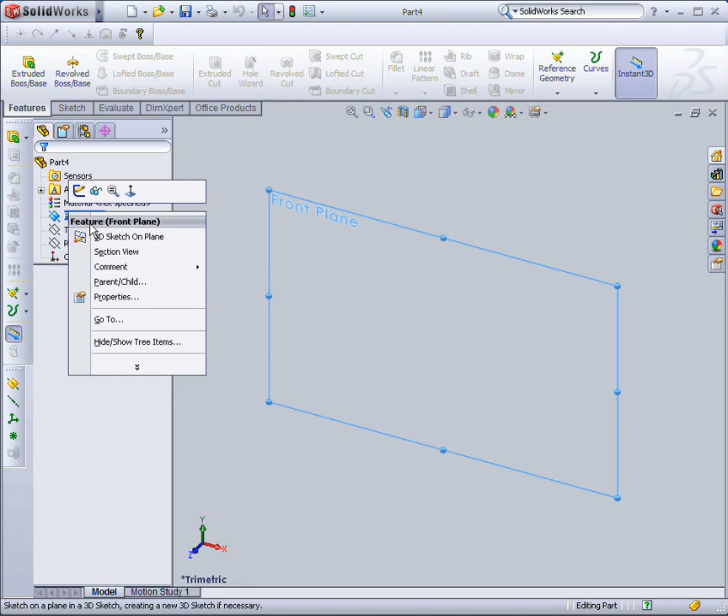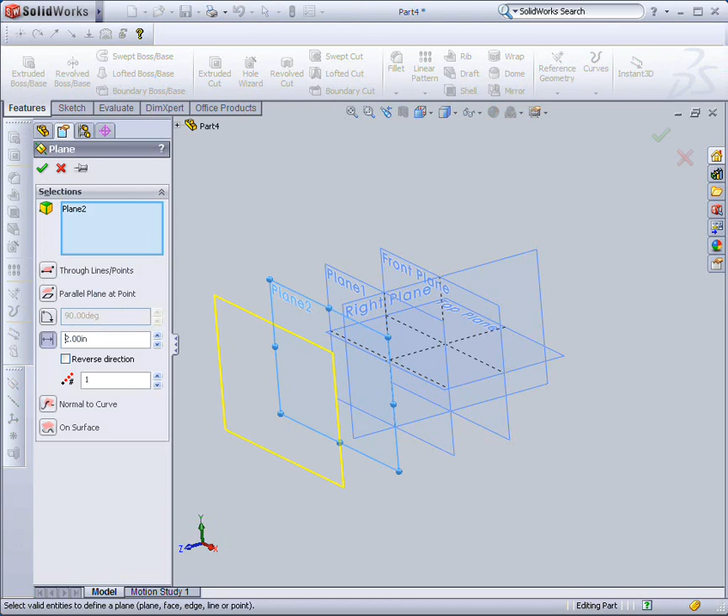Then we're going to copy some planes. Hit the Control key, and drag this plane over here. That'll go over 2 inches, so enter 2 and check OK. Hit the Control key again, drag out the next plane 2 inches, and hit OK. We'll repeat that again and drag the next plane out 2 inches. Now you should have 4 different planes.

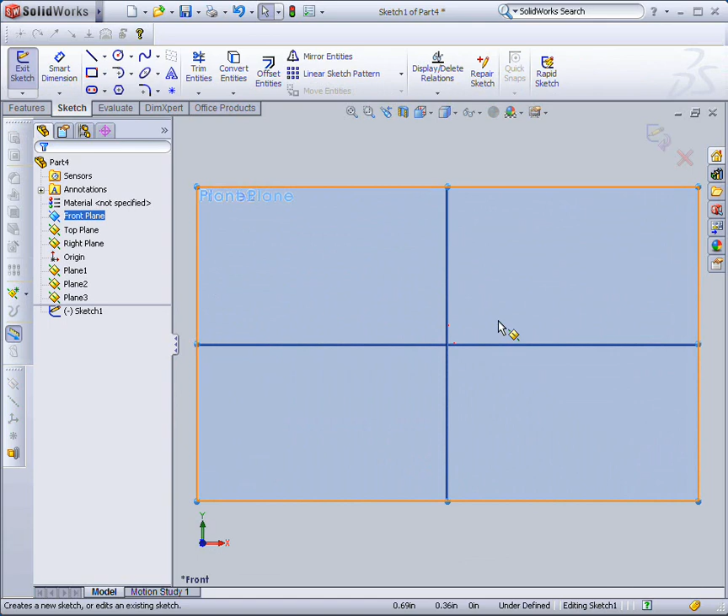We're going to use these planes to define a loft feature that will create our fuselage. So I'm going to go back and select the front plane, and open a sketch on the front plane. We'll start out by sketching the left side of the fuselage.

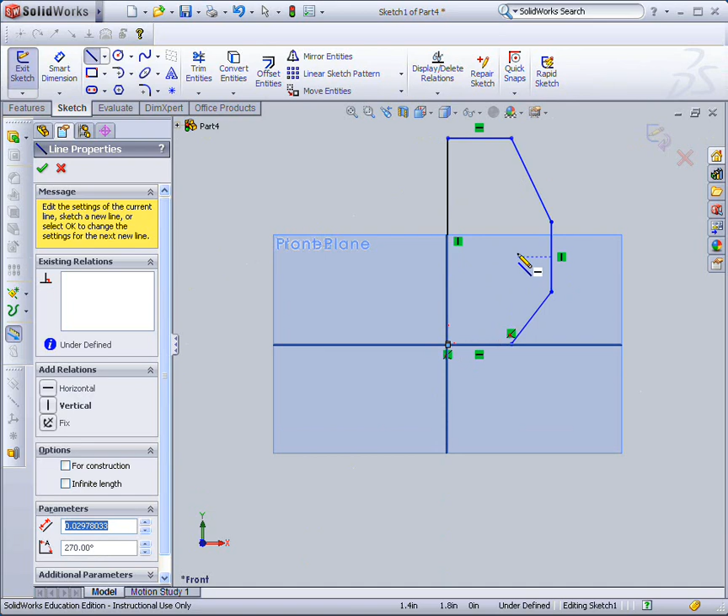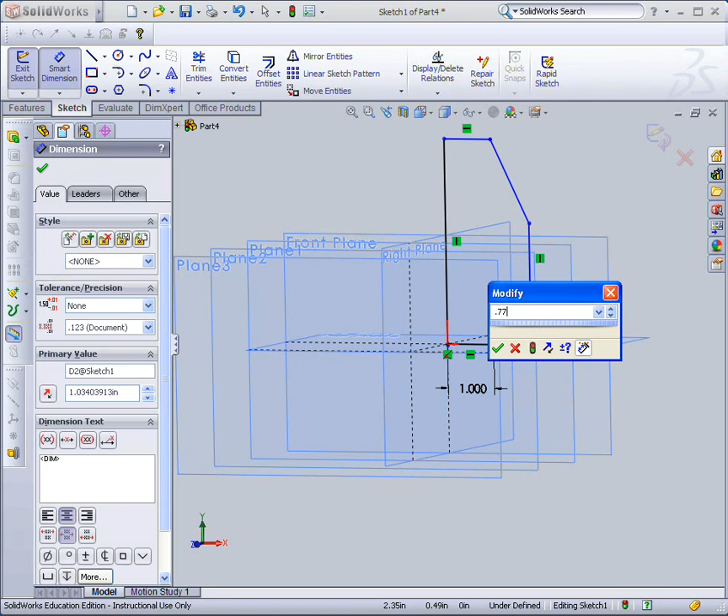So we put those sketch dimensions in, and then dimension the following edges. This one's 1. This is 7, 7, 0. This is 2. This from here to here is also 1. And the whole thing is 4 inches high.

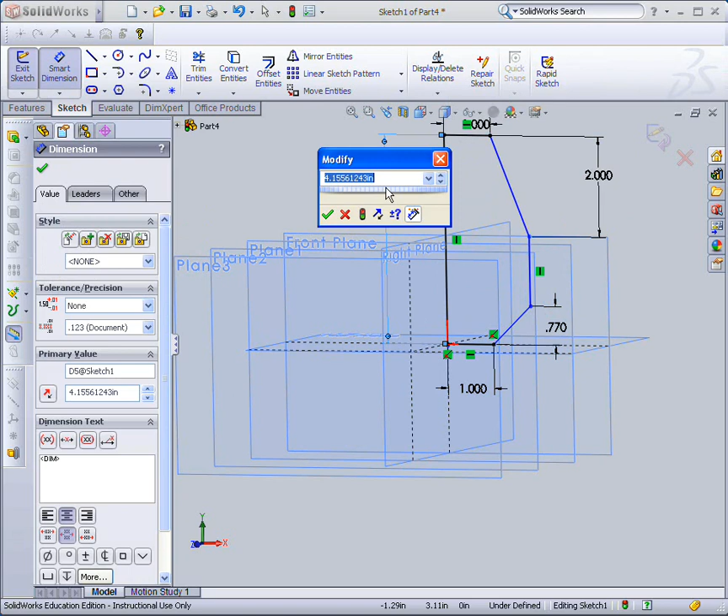And I need a width yet to define that portion. It is 2 inches out from the center. So that's our first sketch. And this dimension's wrong, I missed that one. That is actually 1, not 0.770.

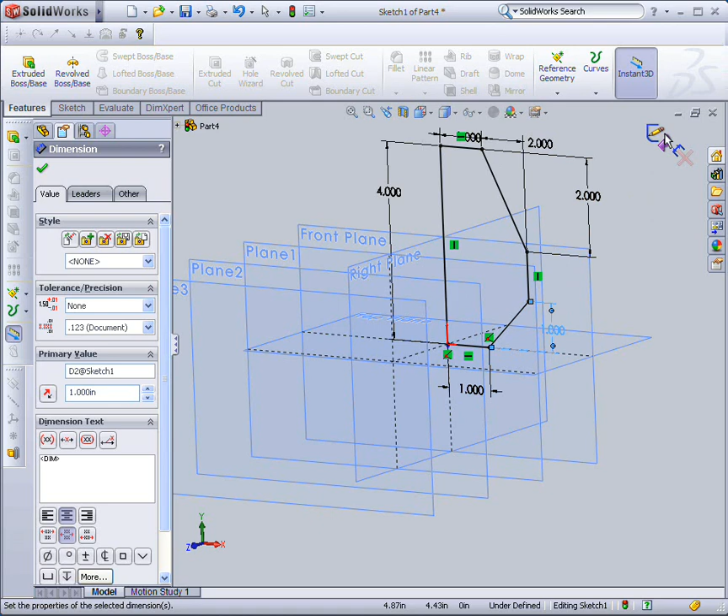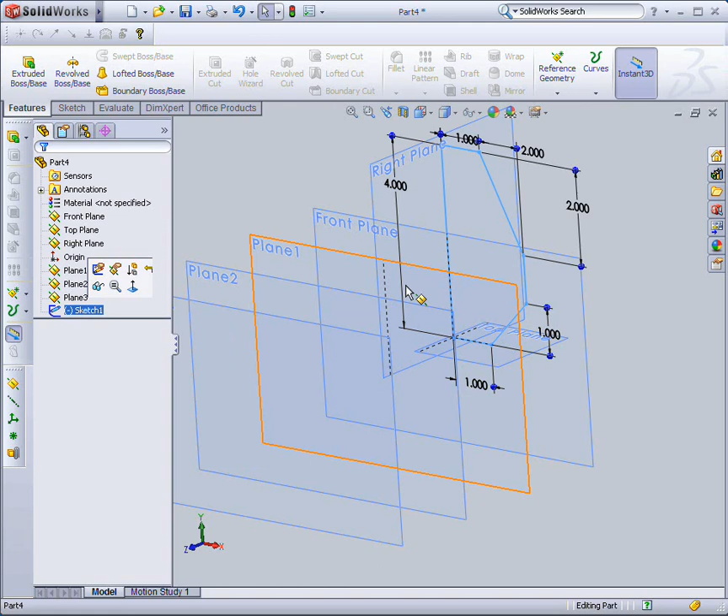So exit our sketch again, and there we have the first sketch for our loft. Now we're going to go over here, select the sketch, turn it blue. We're going to hit Control C, then go on to plane 1 and hit Control V. We've just copied and pasted our sketch.

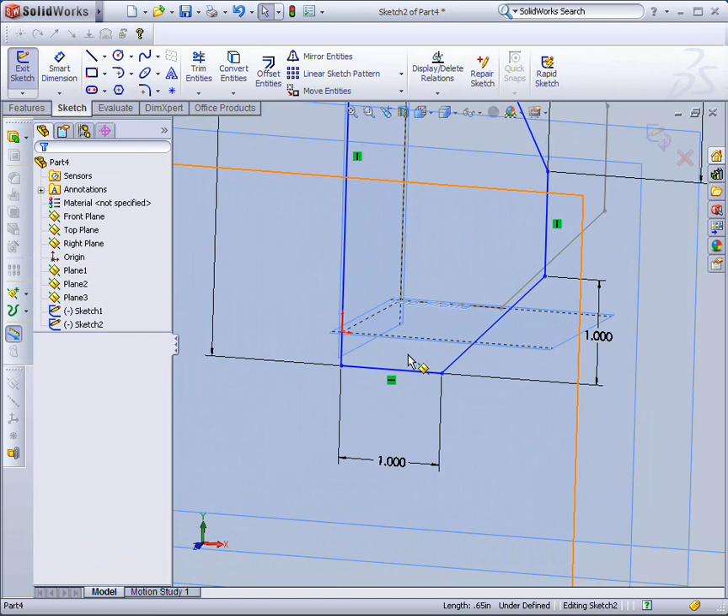Now some of our dimensions are going to change. So we'll right click on that, go to Edit Sketch. You can see everything's blue right now. So we're going to drag some of these around. Ooh, that's interesting, put that extra line in there. So this one we're going to select there, make those collinear, and then we'll do the same with this line here. And if you notice, our whole sketch is constrained now.

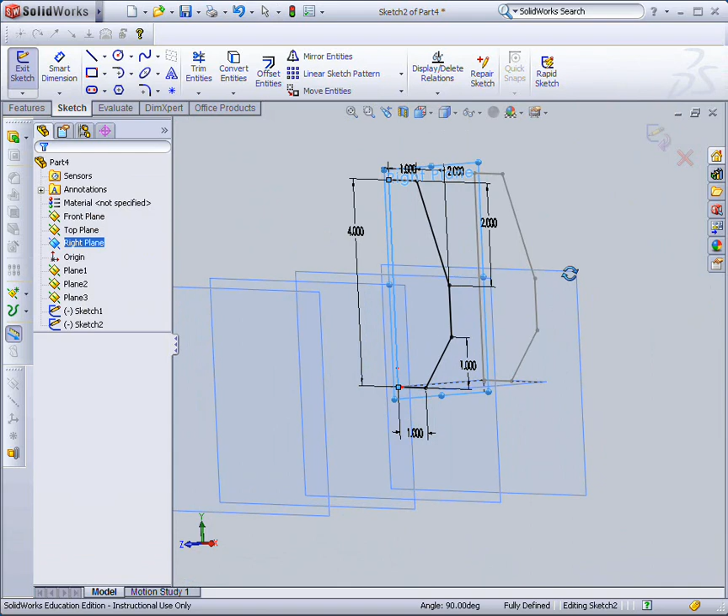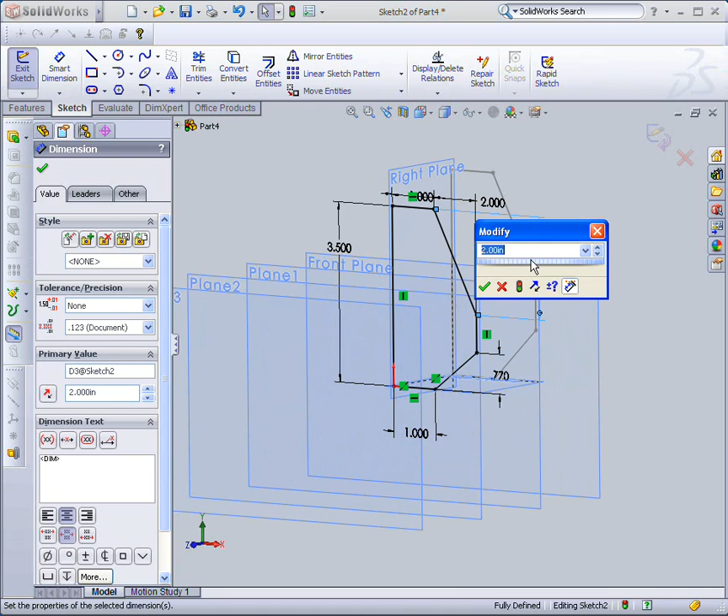However, we have some slightly different dimensions. So instead of 4, we want to make this 3.5. Instead of 1, this is going to be 0.770. And we're changing this to 2.5. Oops, no, that can remain 2. And we're done for that sketch, so we can exit out of that sketch.

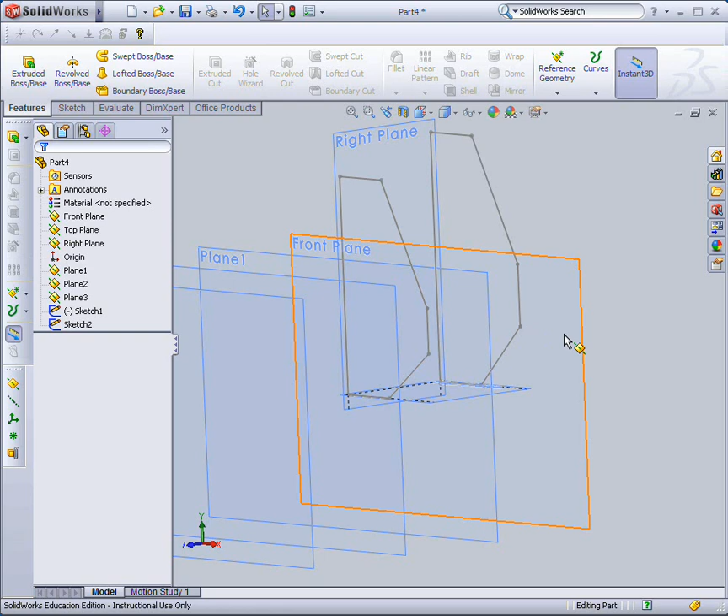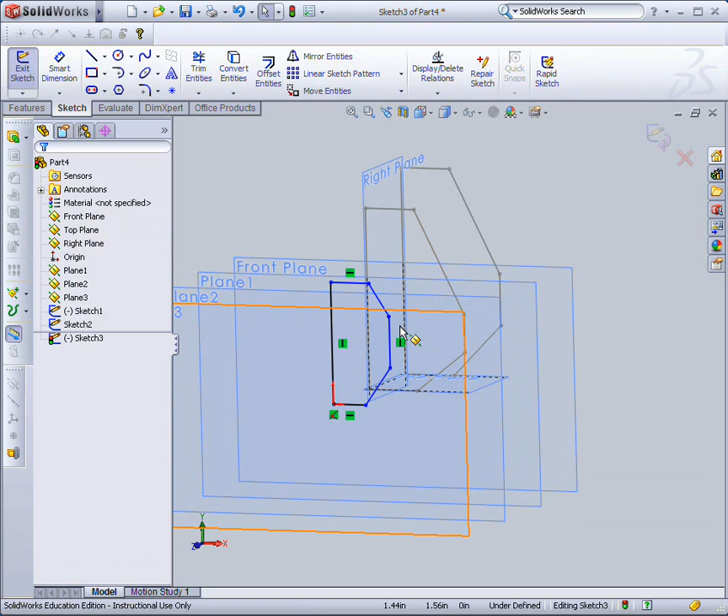The next one we're going to do, we're going to open a sketch on plane 2. Instead of copying it this time, I'm just going to draw a new one. So this one, I'll start down here at the origin, go across, up, this way, back, to there, and then down. Again, we could copy it and modify the dimensions, but I want to show you each way to do it.

So this one's 0.75. This is 2.5. This should now be 1. This from up here should be 2.5. And this will be 0.770.

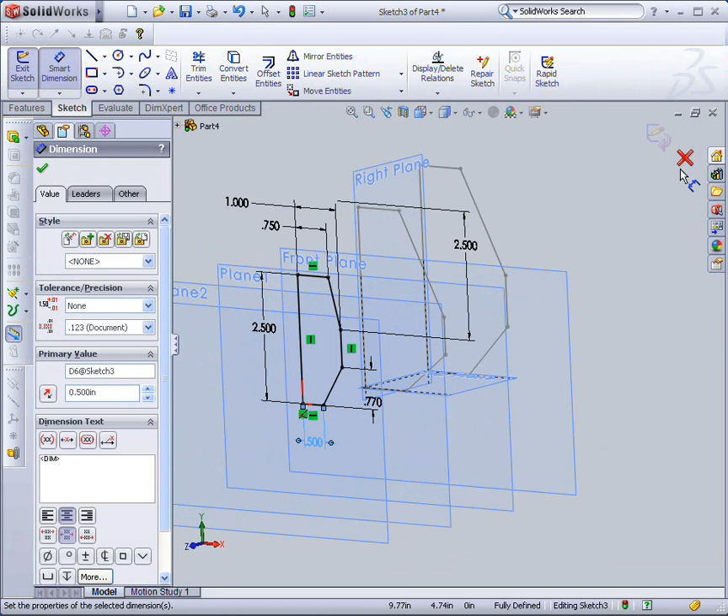Oh, and we're missing one dimension yet. This bottom one is also now 0.5. So that one's fully defined. Exit out of that sketch. Open up a sketch on plane 3. So notice every time I've been doing this today, I'm using the right click to get to the sketch command.

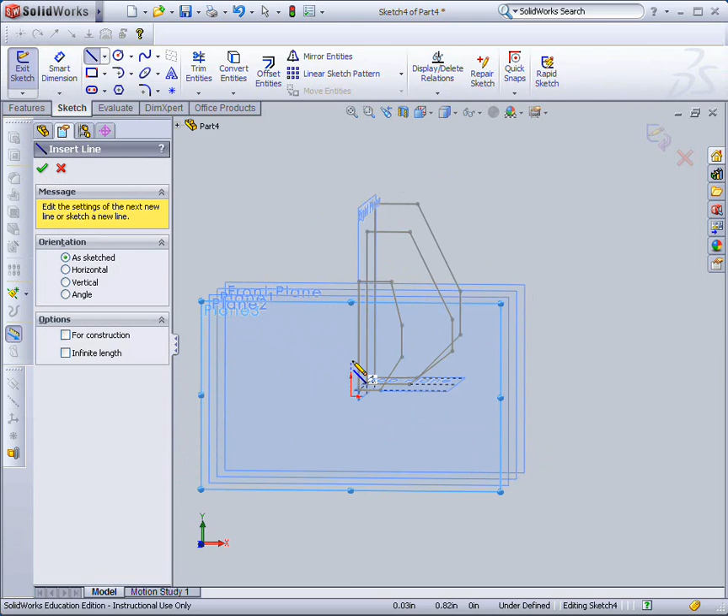In here, we're going to sketch it again. So go across, up, and we've got our last section of the fuselage.

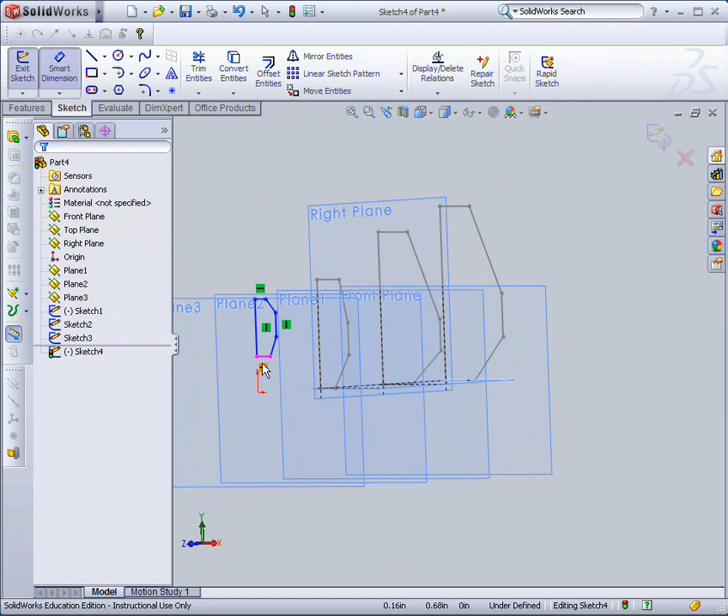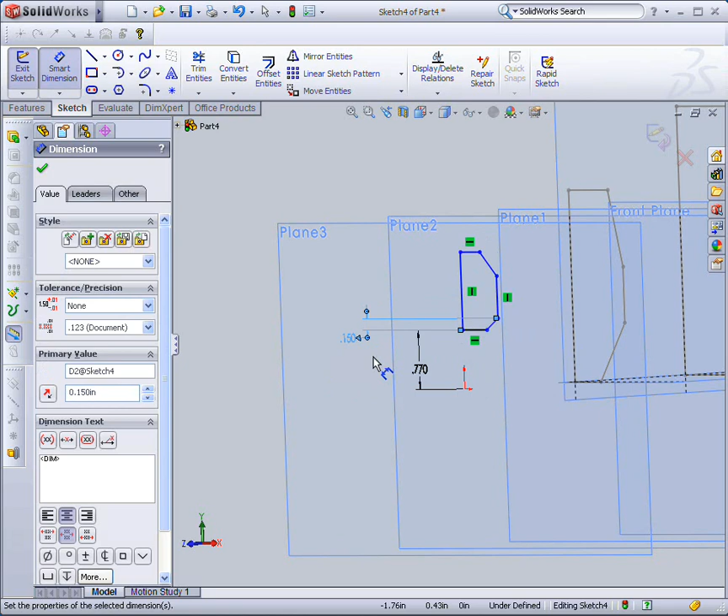This one, when we switch over to dimension, the bottom edge is now 0.770 up. Then from there to here, much smaller, that's 0.15. This whole sketch is still 0.5 wide, and from the top to here is 0.25. Our overall height, which would be from here down to the bottom, will be 1.5.

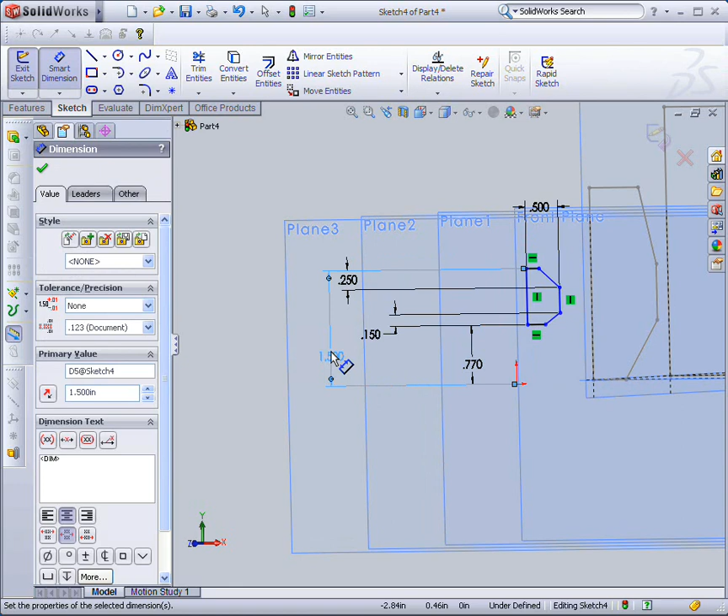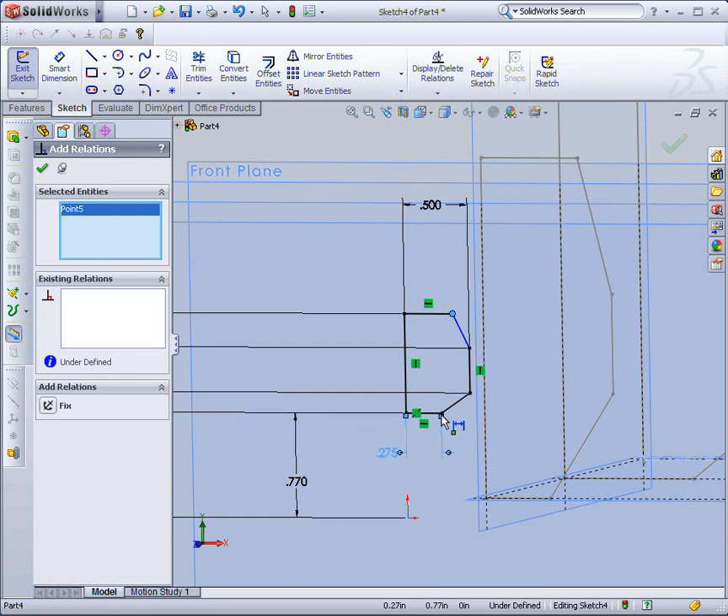And the last thing we have to do is, I could do it two ways. I could pick one of these vertical edges, or I could pick the right plane. We're going to add a relation between the right plane, this vertical line, and make that collinear. And, aha, forgot these dimensions. This is 0.275. And those edges, or endpoints, are vertical. Okay, so now we've got this.

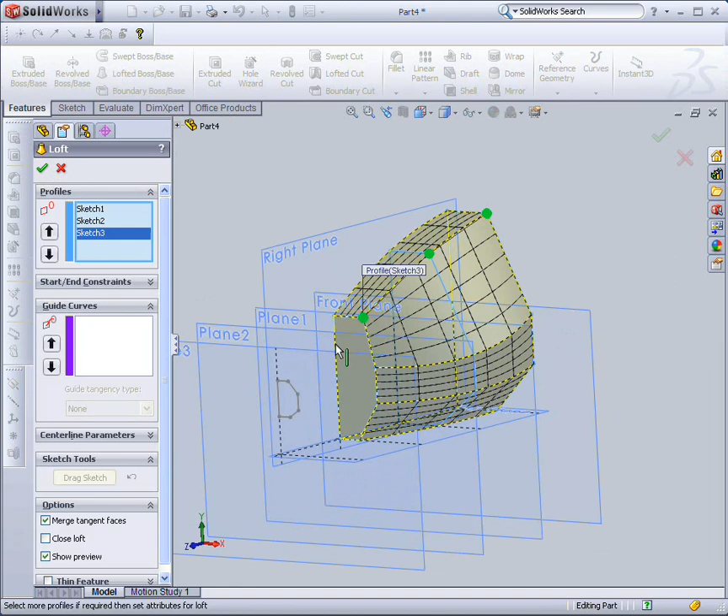Now we're going to go up and select lofted boss base. I want you to click on each of these vertices, and we'll create the outer shell of our fuselage. Once you have that created...

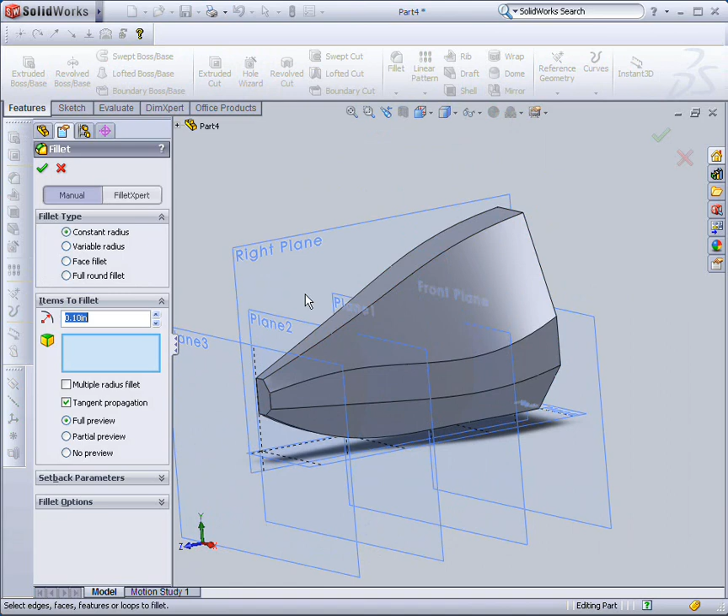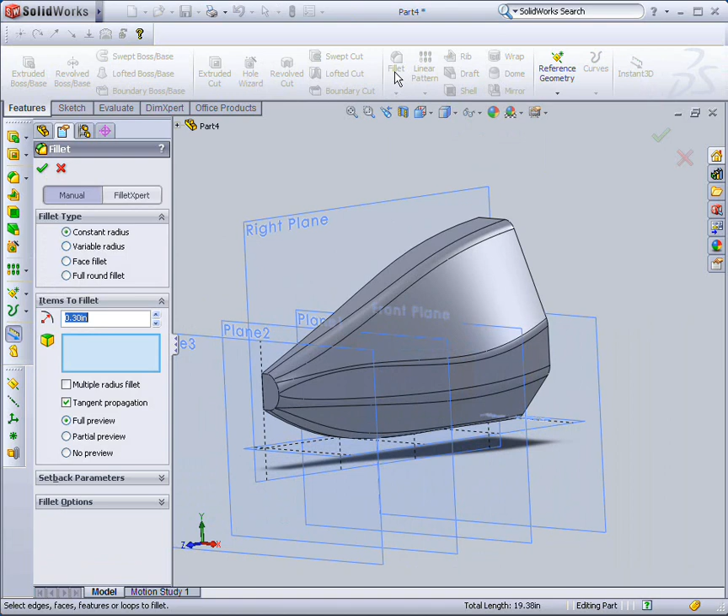Then I want you to apply some fillets. Go up here to the fillet tool, grab this edge, that edge, that edge, and the bottom edge. We're going to move those up to 0.3. Select OK. And then we're going to add a second fillet up here on the nose. Select one of the edges. Tangent propagation should be selected. Check OK.

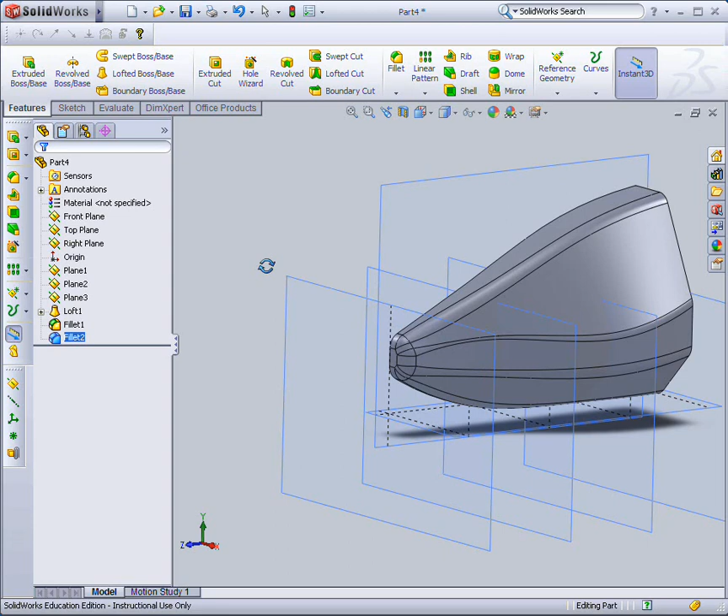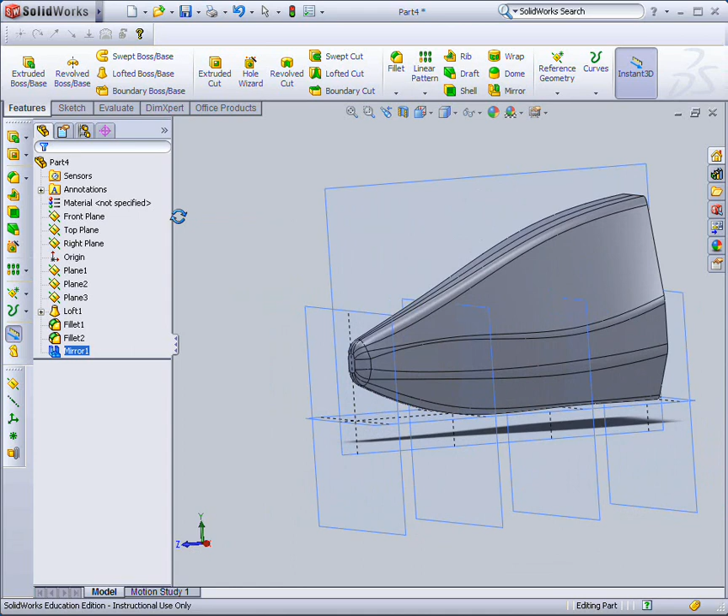And now you've got the start of half of the helicopter fuselage. Up under linear pattern, we're going to select mirror and select the right plane. We want to delete, we don't want to mirror features with this, we're going to mirror bodies. So we're going to select the whole body, check OK, and fuselage is starting to take form.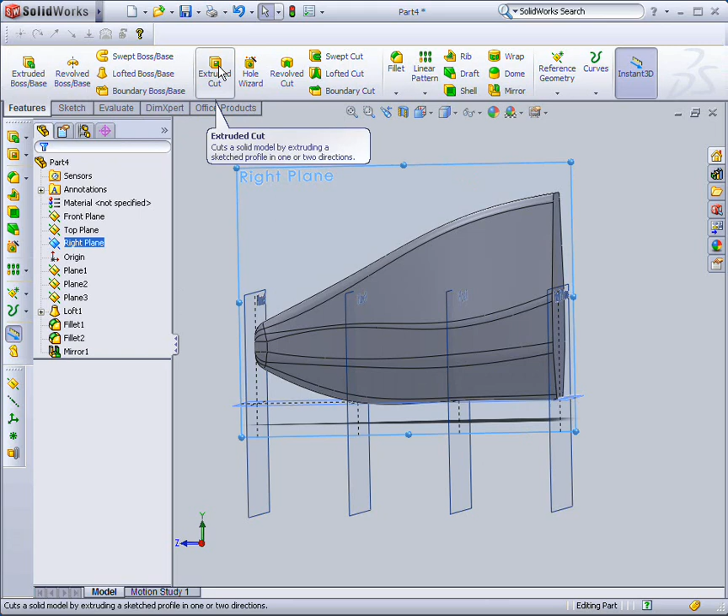The next thing we're going to do is cut away the back portion of the motor area. So I'm going to select the right plane, go up to extruded cut, and draw in a triangle.

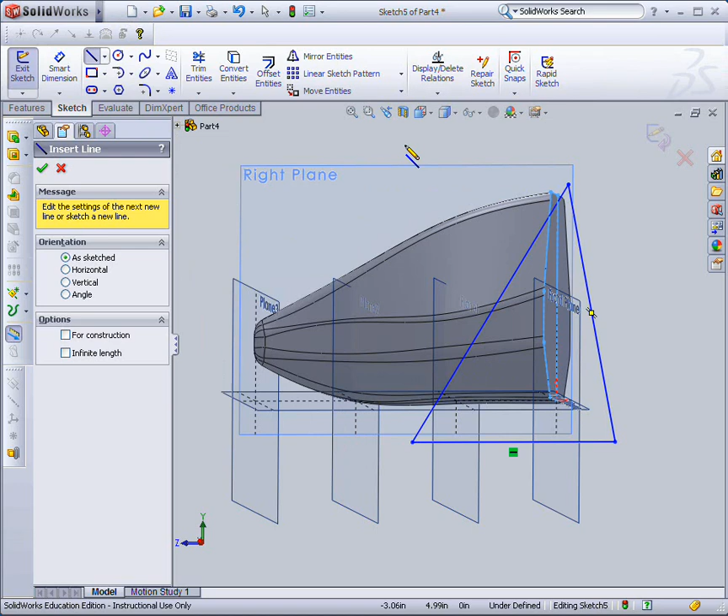So I have that triangle in place, and I'm going to go up here in my part tree, and select these sketches. I'm going to turn that back sketch on. And what that's going to let me do is make these ends coincident. So I'm going to drag this one over, pick that point, drag this one up, get the origin, and look, I didn't have to go add my relations. And then the last thing I'm going to do is dimension this line. That should be 2.

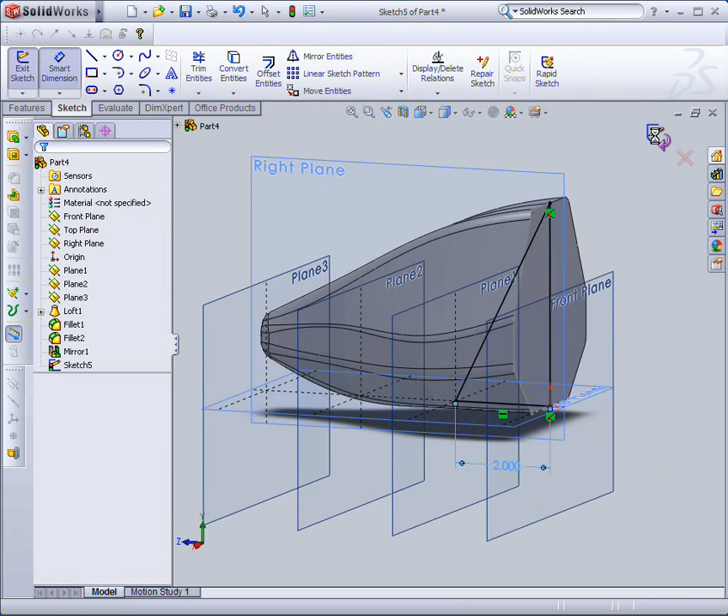And check OK. And since I clicked extruded cut first, it opens up the extruded cut. And then I'm going to select an end condition of through all, and then in direction 2, through all will already be selected. This is direction 2 over here. I'll check OK.

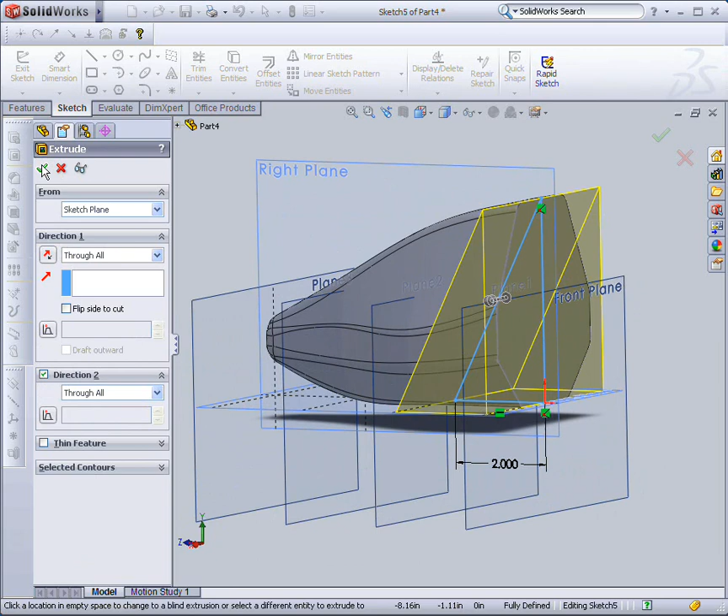And then the last thing we want to do with this, feature-wise, is shell it. So our shell command's over here. Select shell. I'm going to select that back face, leave it at 0.1 inches, and shell it out.

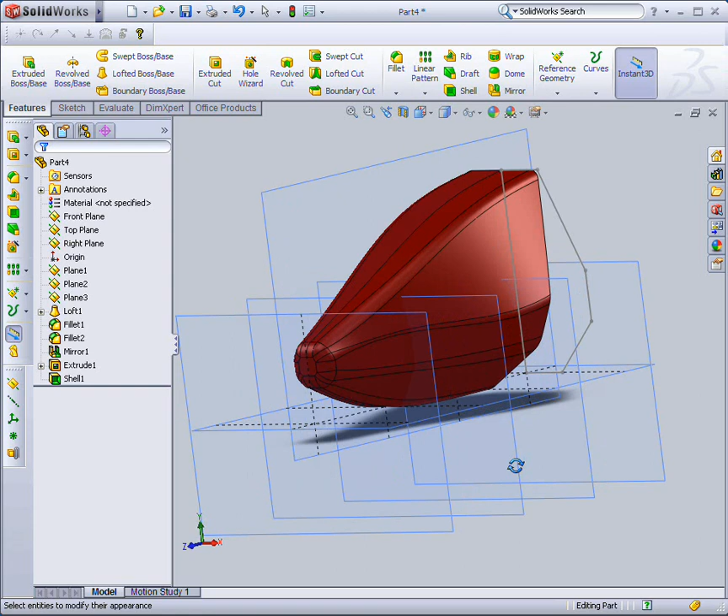I want to change the color. Up here, I'll go to Appearance, and then Appearance. And down here, I'm going to change my color to a nice little crimson color there. And if you notice, we've now got the entire shape of the fuselage.

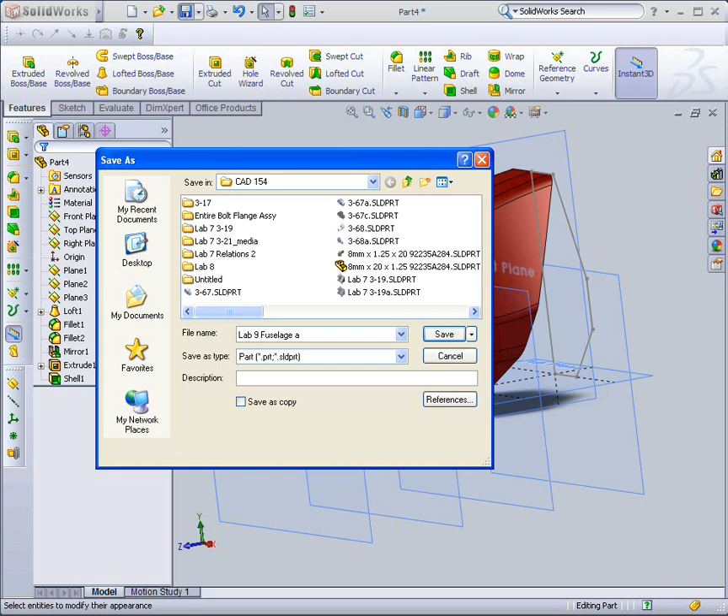I'll go up, select Save. We want to save this as Lab 9 Fuselage. Fuselage is spelled fuse, lage. And that's it for that part.